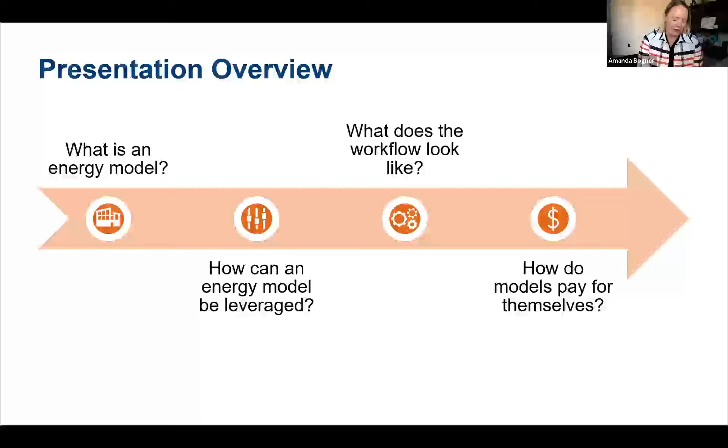All right, this whole presentation is software agnostic. I saw that on the invite for this presentation, you have a graphic that shows all the different energy modeling software. What we're going to talk about today is agnostic to the software choices that you're making. Certainly workflow details are affected by the software that you choose, but that's beyond the presentation. But we can talk about that in the Q&A section. All right. So let's get going and talk a little bit about what an energy model is. But before we do that, let's talk a little bit about why energy efficiency is so important.

So energy efficiency is no longer just an option, but it's becoming a necessity in contemporary building design. And this is kind of four-pronged. So the environmental impact that buildings have is fairly significant. When we look at global energy consumption, buildings make up about 39 to 40% of the total global energy consumption in the world. And so designing energy efficient buildings can drastically reduce that environmental footprint.

Over time, energy efficient buildings lead to substantial cost savings on utility bills, benefiting both owners and occupants. And then many regions around the world have established energy codes and standards that buildings must adhere to. So energy efficient design ensures compliance with these regulations. And efficient buildings often result in better indoor air quality, temperature regulation, and overall occupant comfort.

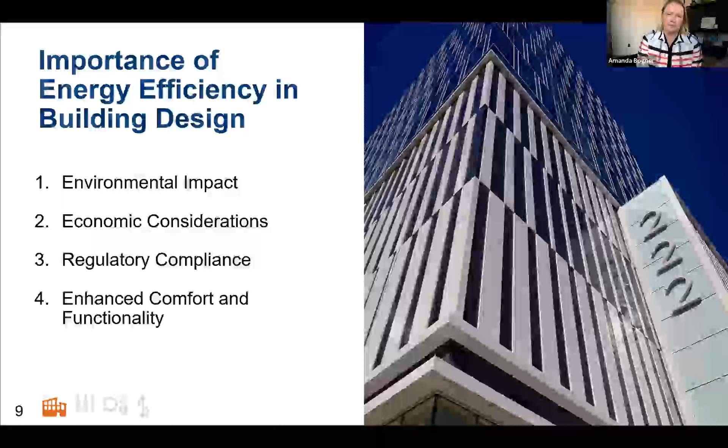All right, so now we can start to answer the question about what an energy model is. So this is a virtual simulation of a building that predicts its energy consumption patterns based on a set of defined parameters. It considers various elements such as building materials, HVAC systems, lighting systems, occupancy patterns, and local climate conditions.

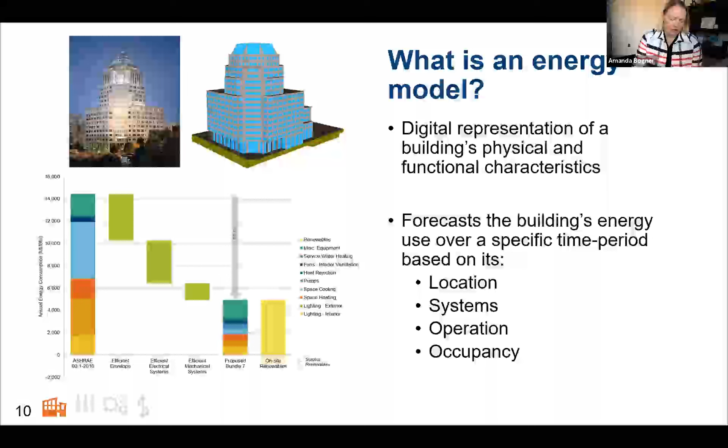So you'll see this graph that I have on this slide later in the presentation. We'll unpack the details of it, but I wanted to give an image of a real life building, so a photograph of a building, how it might look in an energy model. In this case, this was eQuest software a long time ago. And then how that performance might be translated to a graphical or visual representation. So we'll talk a little bit more about that specific case study in a little bit.

All right, so let's talk about the benefits of using energy models, and then I'm sure your panel next month will expand on this. When we're looking at this, we really are looking to improve energy efficiency. That's the bottom line of why energy models are usually engaged by design teams. And this is really done because it helps inform decisions. Energy models allow architects and engineers to test a variety of design alternatives and select the most energy efficient option.

It provides a holistic view. So beyond individual components, energy modeling provides an integrated view of how all the building systems interact together. And it helps us reveal synergies and conflicts. And we also can do a little bit of predictive analysis. So rather than reactive adjustments post-construction, using an energy model can help in predicting performance and making proactive design choices.

We also look at cost savings over the building life cycle. Obviously, that's very important for our owners and operators. And so using an energy model, we can help reduce operational costs. So again, going back to analyzing a variety of alternatives, we can also understand which of those alternatives lead to decreased energy consumption or decreased demand, electric demand or energy demand, and that often will lead to operational cost savings.

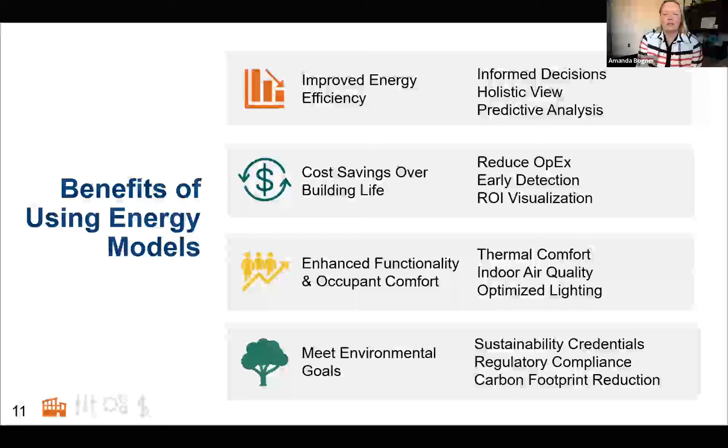Ultimately, we're all trying to reduce a carbon footprint. Buildings play a pivotal role in global carbon emissions. Optimized designs can significantly reduce a building's carbon footprint and contribute to larger environmental goals.

All right, let's move on here to talk a little bit at a high level about what the work looks like, and then we can talk a bit about how we might leverage these. So energy modeling requires a systematic and organized step-by-step process.

We're gathering information about lighting systems, not just fixture counts and lamp wattages. We're also looking for understanding on controls, what type of daylight strategies might be available, and evaluating those energy savings potential. But really, that's not much different than a load calc, right?

Where an energy model changes it up is we apply operational schedules. And we're not just looking at your design days, at end of summer and in the dead of winter. We're looking at how the building performs at every hour over the course of a year. And so understanding how that building is going to operate, how occupants are going to interface with the building is a really critical element of that data collection piece.

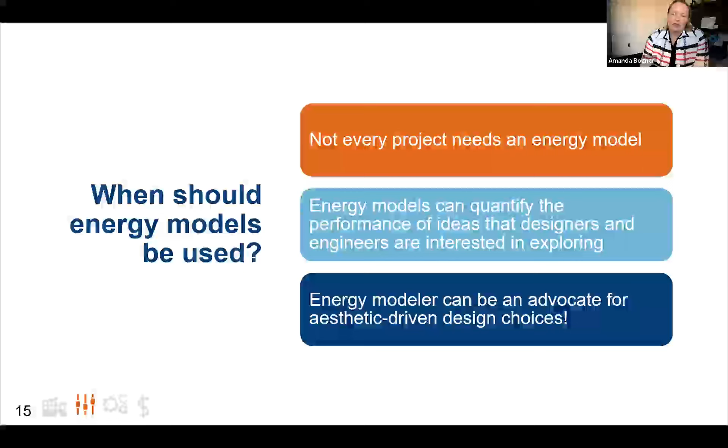All right, so the old adage of begin with the end in mind is especially meaningful in energy modeling. Energy models are most effective when they are developed with a clear vision of the end goals. This ensures that the energy modeling process is purposeful and aligned with project outcomes. Energy models can be used to develop a robust energy strategy and achieve energy goals like meeting energy usage index targets, or EUI targets, and reducing operational carbon.

We can use models to meet many goals beyond just LEED credits, including tax deduction documentation, applying for utility incentives, and demonstrating code compliance, as I mentioned earlier. Leveraging an energy model early in design, when a stringent energy code is applicable, allows an owner and project team to have line of sight to how the design compares to the code early on, which avoids costly redesigns and ensures regulatory approvals once we go in for permit.

Finally, in the measurement and verification phase, a design case energy model sets the baseline for post-construction M&V efforts. So it really helps the owner know, are we in bounds or out of bounds of reasonable operations when we look at our total energy bill. It's not going to be absolutely perfect. The energy model's never a one-to-one comparison to real life, but it gives us an order of magnitude that we can work from to try to troubleshoot operational issues.

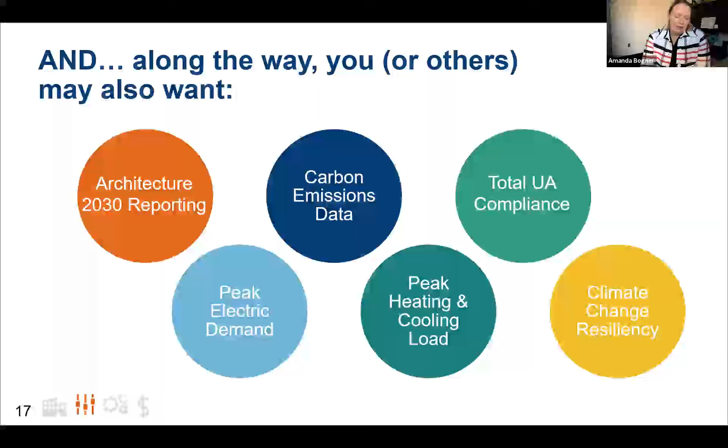All right, so I mentioned that energy models can be used to answer a lot of questions. It's not just a technical tool, but a decision-making resource. Questions can cover a wide range of areas, from what energy efficiency we need on a particular piece of equipment, to is my building compliant with the energy code? This is a small sample of the most common questions we hear on projects. At a high level, energy models provide indicators by estimating energy consumption, carbon footprint, and the financial viability of energy efficiency and renewable energy strategies.

And we can get design-specific insights. So energy models evaluate design-specific questions, such as the impact of building orientation or envelope design choices. How much insulation do I need in this wall? We also can look at passive design strategies and HVAC system choices.

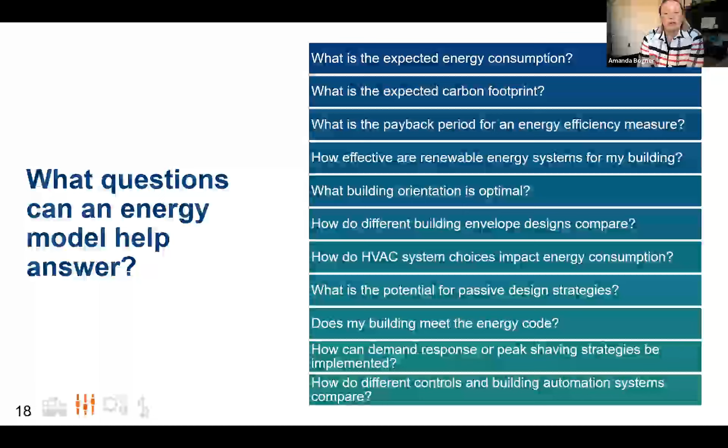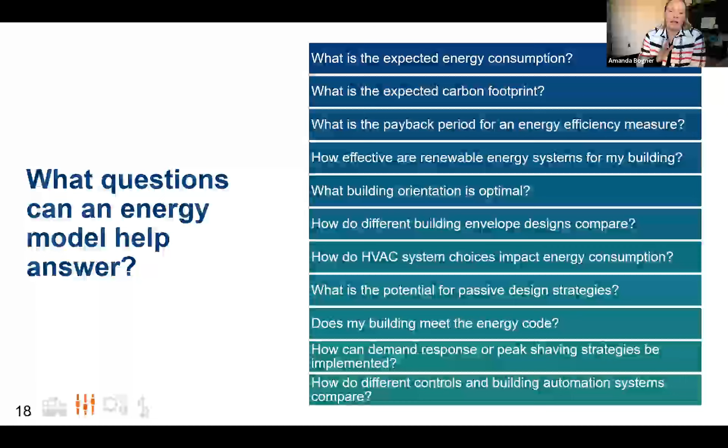Finally, energy models address code compliance by verifying adherence to energy standards, and they can be used to evaluate grid interaction through strategies like demand response and peak load shaving to optimize utility, grid performance, and costs. And I think that last piece is really something that is becoming absolutely critical to our electric grid. A lot of design teams, when they're focused on a building, are not necessarily thinking about how this building impacts the wider grid.

All right, so let's move into a little bit about what the workflow looks like. The initial phase of the design process is where energy modeling goals are usually first defined and incorporated into a project vision. This step sets the foundation for integrating energy modeling into the entire project life cycle. So let's look at that.

All right, and my click's not working.

All right. So when we're thinking about this first phase of an RFP and/or having a design charrette, we're really after a couple things. We want to establish our energy goals. So establishing clear and measurable energy goals during the RFP or the charrette stages is absolutely critical. So an RFP from an owner might call out specific energy goals. I am curious to know if you're seeing that in your area.

But if they're not specified there, then the charrette is the opportunity where the design team has an interaction with the owner to be able to establish what those goals should be. The charrette is a collaborative workshop where stakeholders, all the design team members, as well as the owner and sustainability consultants, come together to discuss project objectives and kind of get on the same page. Including energy models in these early conversations ensures that energy performance goals are realistic and aligned with design priorities.

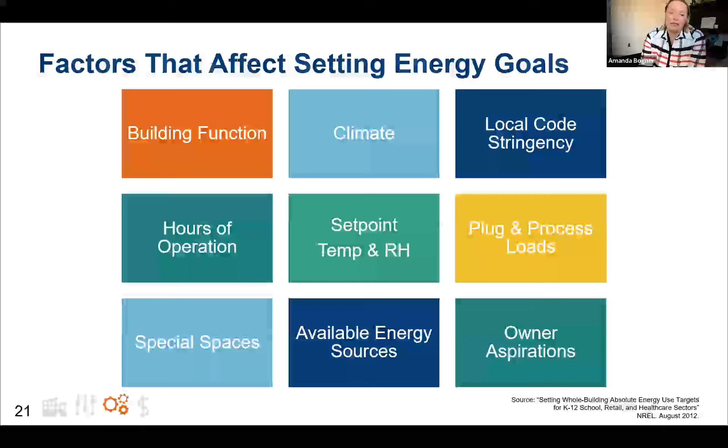And then there are other tools that I'll say really stretch a project. So the Zero Tool is focused on the Architecture 2030 challenge. Energy Star Target Finder definitely has a threshold. You have to be in the top quartile of buildings of your type in your climate in order to be eligible for Energy Star. And then the laboratory benchmarking tool is being used as well in that kind of sphere to understand how we are comparing to our peers, but then also stretching performance. An owner's own portfolio might also give some insight into what they have been willing to buy in the past, if you will. And so that is also a good starting point.

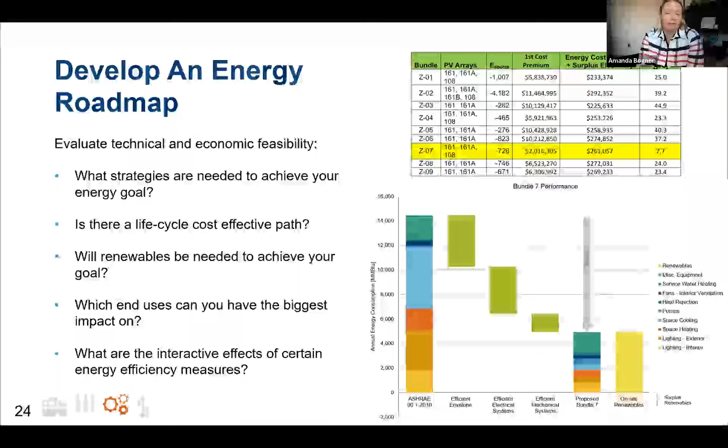Okay, so moving on now, let's talk a little bit more about early phase models and how they play a crucial role in developing our roadmap. The next couple slides are intended to give you kind of an idea of how you might use an energy model for those early things. So one of the things that we look at often is building orientation. So really this comes into play when the site does not have significant constraints, and we can site a project or a building in a variety of ways.

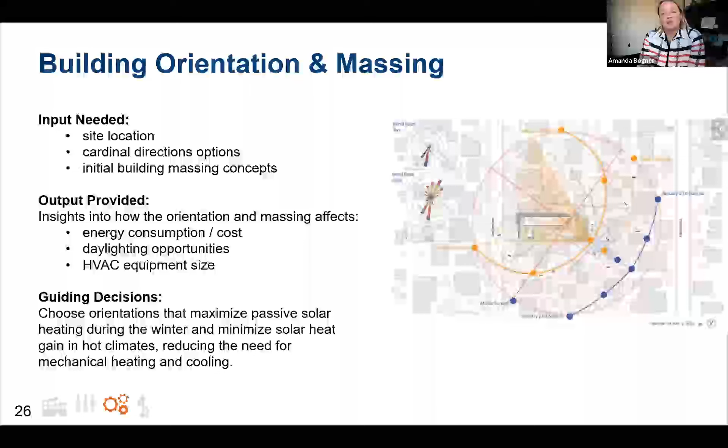So designers can get preliminary insights into how orientation affects energy consumption. We also look at how daylighting opportunities are affected by orientation, and then also a little bit of thermal comfort comes into play there as well. All right. Here we also look at envelope design. So early phase models, usually in our experience, have a focus on optimizing our envelope performance.

Designers can obtain preliminary insights into how the... that's my orientation notes, not my envelope design notes. We would be looking at how much insulation would be able to be included, considering budget and some condensation factors, but then also looking at what is the appropriate amount of glass. That ultimately is always a question on every project. And what type of performance does that glass need to have?

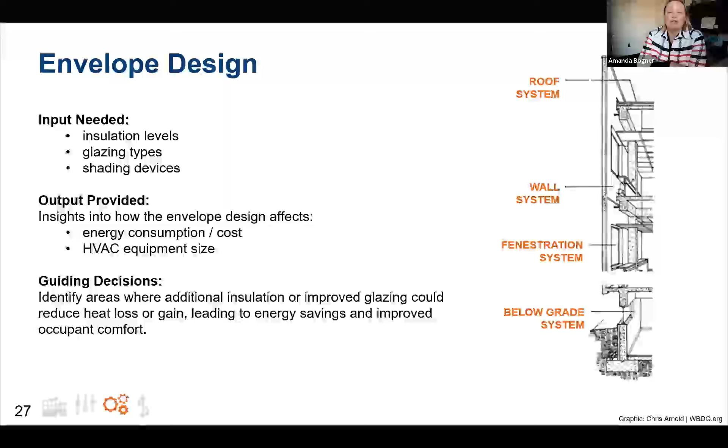Let's see. For HVAC system selection, we look at, I would say high level, what types of HVAC systems would be appropriate for this particular project. For a school project, sometimes we compare ground source heat pumps with traditional VAV overhead with maybe a third system type. So really looking high level at what system's going to put us in a better position to achieve our energy goal than other systems. And then marrying that up with life cycle cost analysis as well.

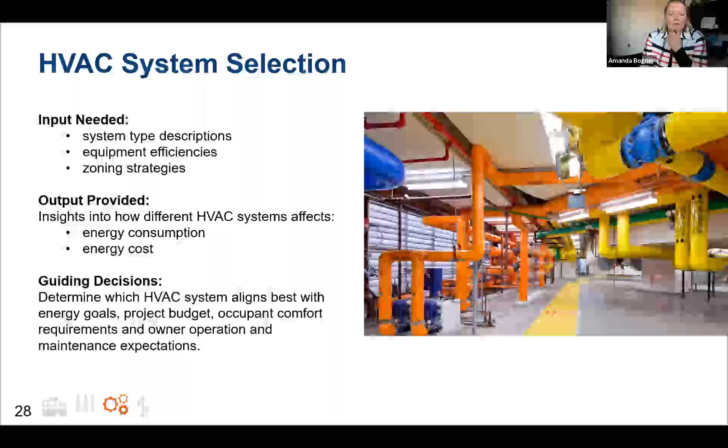And then when hurdles are met, ultimately we can leave schematic design with a roadmap that might not end up being technically feasible later on because information that we did not know during that early phase comes to light. So really at design development and construction phases, we're looking at using the energy model as a guidepost, as a review process, a third set of eyes, if you will, to understand, okay, is the design tracking along that roadmap?

Are we on track, or do we need to make some adjustments? Or do we have new information that makes one of our strategies inappropriate? And then working to evaluate new strategies to make up for what has been lost.

Then during the post-occupancy phase, this is really about monitoring and validating performance. So once the building's occupied, actual energy consumption data can be compared to a model's prediction to validate both the model's accuracy, but then also inform whether the building is operating as expected. So we have found a myriad of things during post-occupancy or post-operation where the energy model has actually helped identify things that have been going wrong. So this can be married up with some commissioning activities.

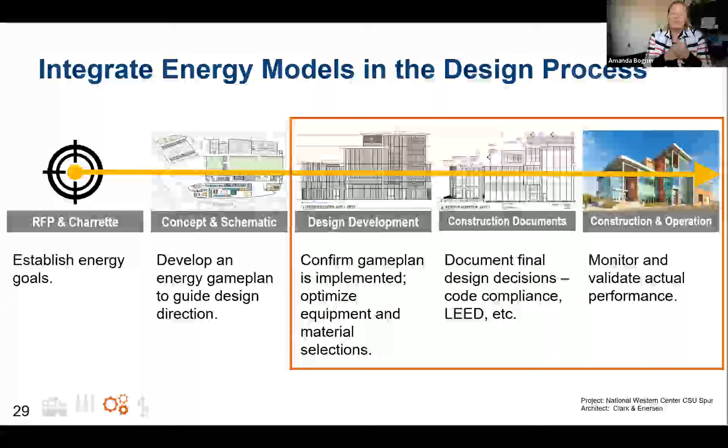So it was just one kind of insight of like, well, okay, we expected this pump to be performing in this way. We're seeing it perform another way, and working with the owner to get it corrected. But without that energy model, that may have been overlooked for a long period of time. Okay. All right.

So all of the energy modeling things that we talked about so far have kind of a backdrop of ASHRAE 209. ASHRAE Standard 209 was just recently updated in October, but it's the Energy Simulation Aided Design for Buildings Except Low-Rise Residential Buildings. I love ASHRAE and how long they make all the titles, but it provides guidelines and procedures for using energy modeling in the design and construction process.

You can use ASHRAE 209 to create a comprehensive energy modeling scope of work. And we kind of think about that in three ways, and we've talked a little bit about this already. So identifying project goals, we select appropriate modeling cycles that pair up with those project goals. And then we outline project milestones. So, creating a timeline for energy modeling activities, highlighting key milestones in the design and construction process, and really specify when energy models should be delivered and reviewed by the project team so that they can actually be useful for the team to make decisions.

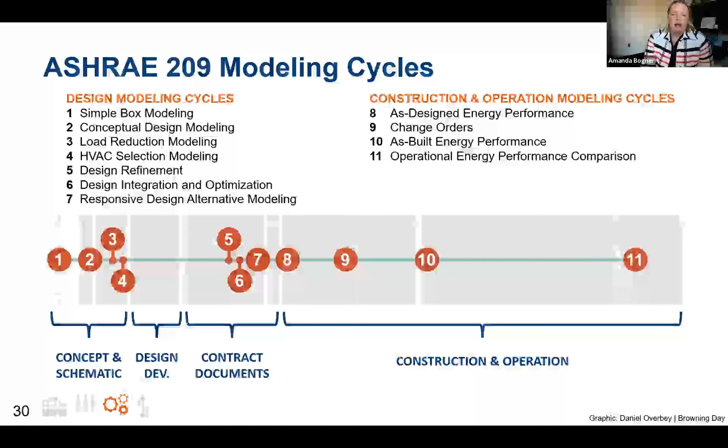So if you're struggling with writing some scope of work information, you could turn to ASHRAE 209 to provide some common language that would be understood throughout the industry. All right.

So when we're talking about energy models, sometimes energy models are done by design team members like an HVAC engineer or an architect, but sometimes you're going to engage with a professional energy modeler that maybe has the Building Energy Modeling Professional certificate from ASHRAE. So someone that's dedicated to this. All energy modelers, regardless of where they fit in the design team, are technical experts. They become the energy translators on projects that bridge the gap between complex data and actionable insights.

They contextualize data by putting technical results into the context of a project's goals, whether it's energy efficiency, cost savings, or sustainability certifications. For architects and designers, energy modelers translate energy performance metrics into design adjustments, such as envelope changes, HVAC system selections, or orientation refinements. But for building owners and decision makers, energy modelers provide high-level takeaways, such as financial paybacks, operational savings, or carbon footprint reductions to facilitate decision-making.

So if you're not accustomed to hiring a dedicated energy modeler for your project and you're working on something fairly complex, I would definitely recommend thinking about how that fits into your workflow to be able to harness that technical expertise and communication element that energy modelers are able to bring.

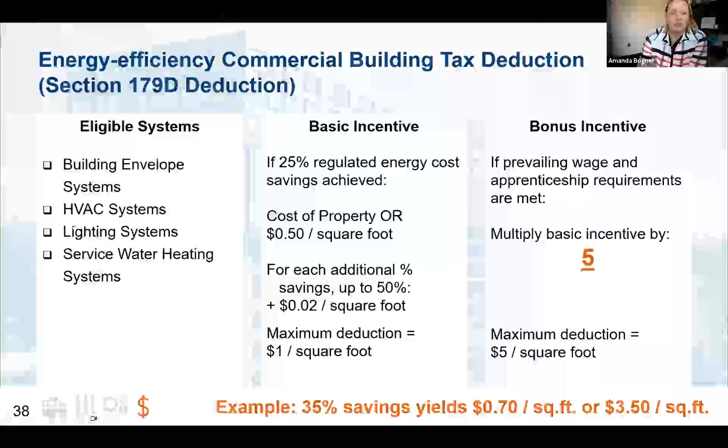So for example, if your project demonstrates a 35% savings, it either will be 70 cents a square foot, or with prevailing wage $3.50 a square foot of tax deduction. So how is this determined? Of course, because it's in this presentation, it's determined using an energy model. It's compared to ASHRAE 90.1 2007 as the baseline.

But what's important here is that it's only regulated energy costs that we're actually looking at. So while plug and process loads are excluded from the savings equation, they're still included in the energy model as they affect how building systems operate and perform. But we get to extract the energy cost associated with those plug and process loads to determine the savings percentage.

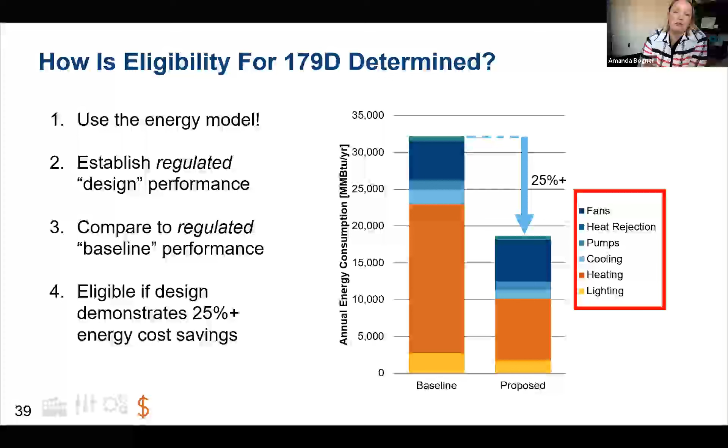Now, if your firm is a 2030 commitment signatory, or you work with architecture firms that are, and they're meeting that, then those types of projects are likely eligible for the full 179D tax deduction. After 2026, the baseline does change to 2019. And so in that case, projects that are achieving that 2030 commitment target would be what's eligible.